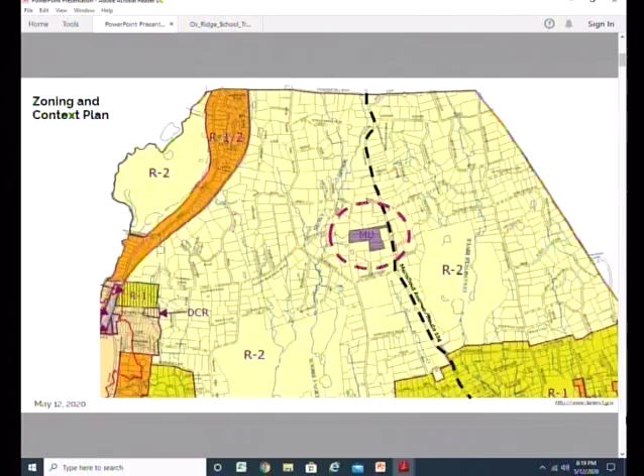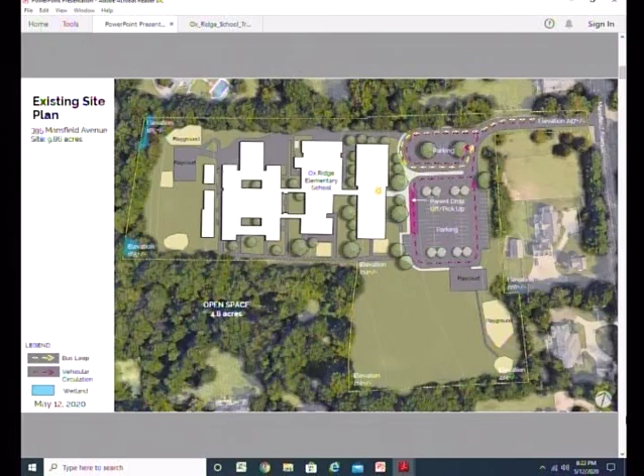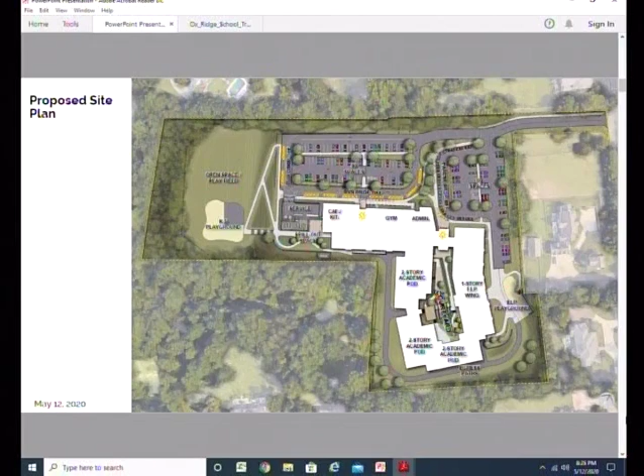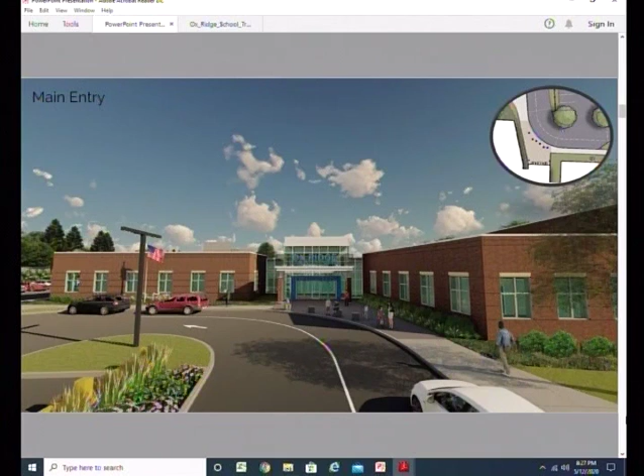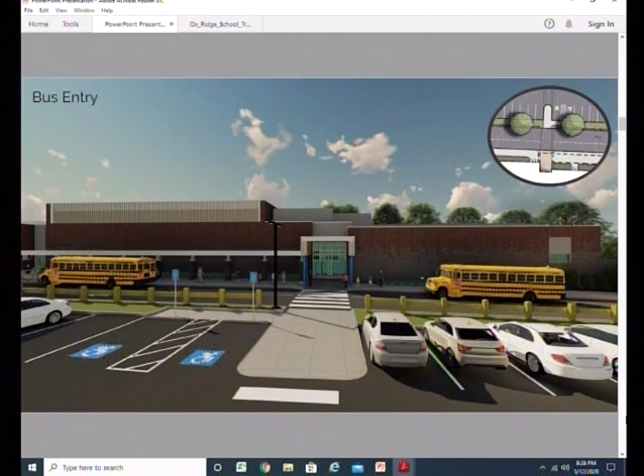This is a view from the bus loop, from the entrance from the parking lot within the bus loop, looking at the secondary entrance into the lower assembly area of the building. This is where the students would ingress and egress for loading and unloading the buses, as well as this serving as a secondary entrance for community events after hours for use of the gym, cafeteria, and other large assembly spaces within the building.

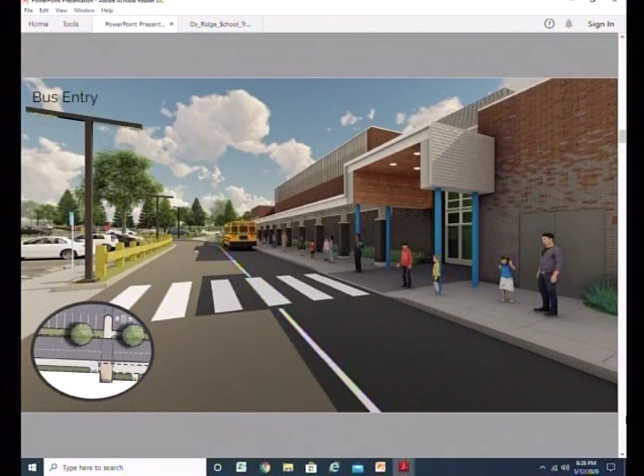Just a different view of the bus loop, showing an extended bus loop canopy, and how the bus loop works. There is a park aisle for the buses as well as a drive-by aisle for buses to move in and out as they load and unload.

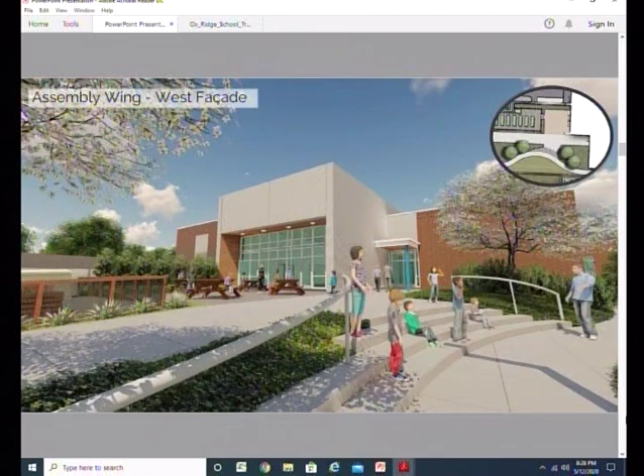As we move around to the west side of the building, this is outside of the cafeteria. That large glass facade is the cafeteria space behind. We also have an exit from the corridor, which is that small canopy and blue column. That main circulation path comes down that sidewalk immediately to your left in the image and continues down to the K-5 playground.

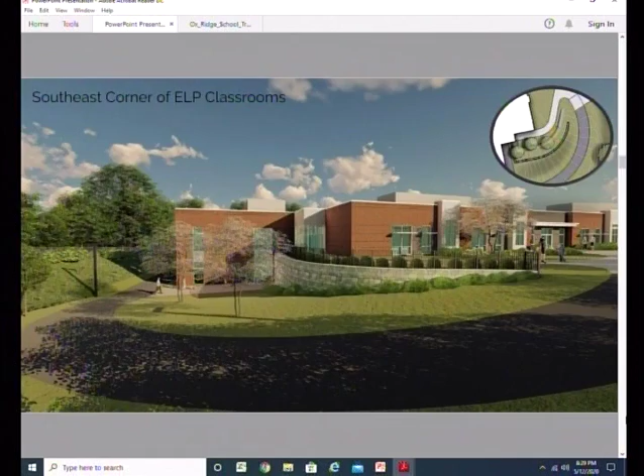Just another view of the early learning program wing. The design was intentional, creating a rhythm to try and break up the scale of this long single-story building, to help address the scale of the residences immediately adjacent to it to the east. You can also see the ELP playground there in the foreground.

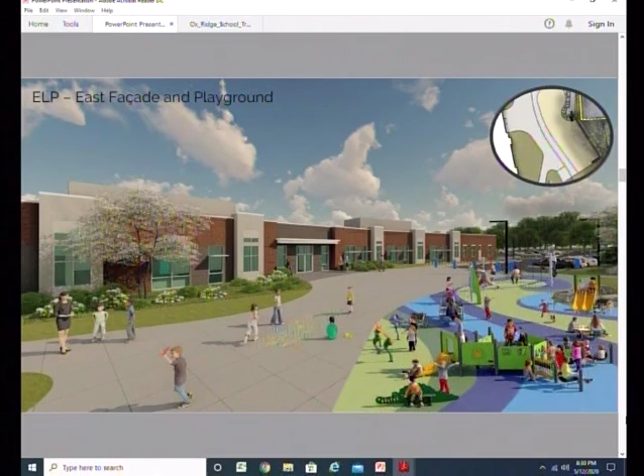One of the main features of the school is the interior courtyard, which has been developed to be a curriculum space as part of the school program. It takes advantage of the one full-story building grade change from the upper ELP single-story building that's in the far view of this image.

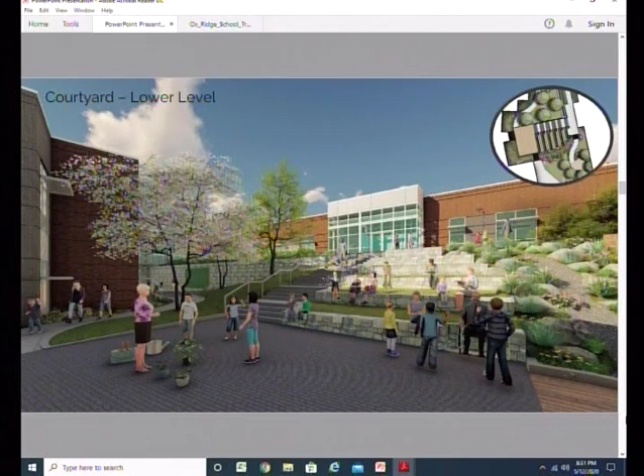We have developed an amphitheater type space that helps transition from that upper level down to the main level or lower level of the courtyard, creating an outdoor classroom and outdoor seating steps to enable multiple classes to come outside into the courtyard and have an outdoor classroom environment.

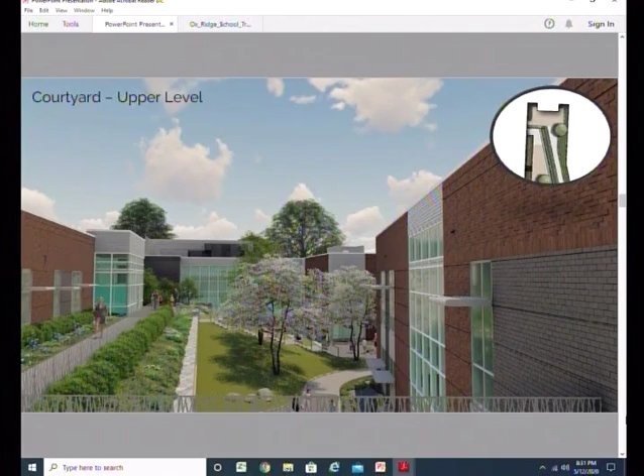Just another view of the courtyard from the upper level, just outside of the main entrance lobby. As you come through the main entrance lobby, you can emerge back out into the courtyard, and this would be the view, where you can get a better sense of the full-story elevation change from upper to lower, left to right on the page. We could just advance through the next one, and that's just looking back at that entrance lobby from where we were.

As far as building height, we are within the height allowance for this site, R2 and MU. We are at a 31-foot 3-inch building height from an average grade plane established around the building. The main floor level is at 224, with the assembly level at 218, which is 6 feet lower, and our lowest level at 210. So we have a 14-foot floor-to-floor elevation change from the main entrance level to the lower level.

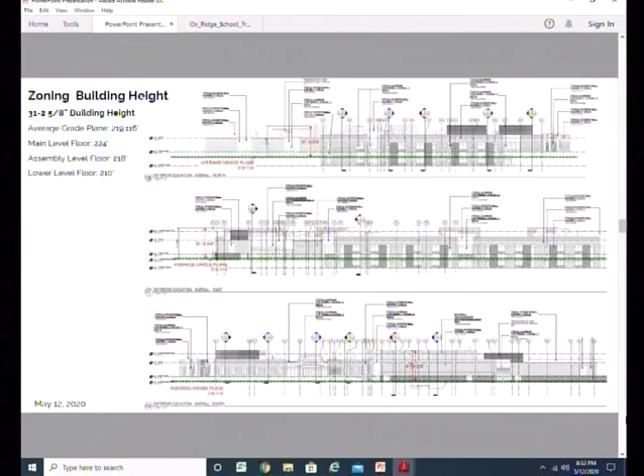So at this time, I'd like to transfer to Jessica Petro, our landscape architect, and she's going to run through some more details with regard to the plan and zoning.

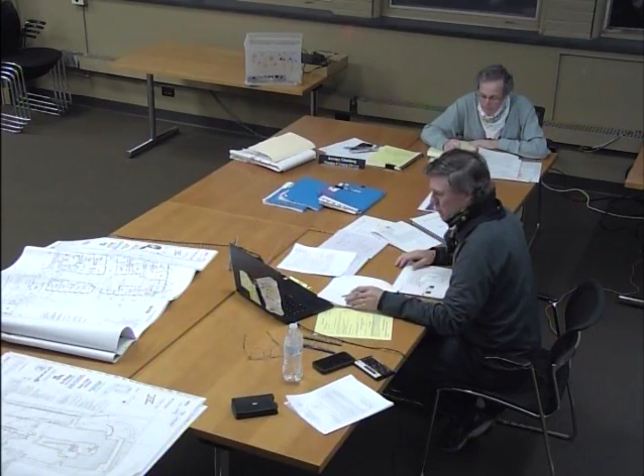I just wanted to do a couple of threshold questions myself, and then pass it off to my fellow commissioners. Just correct me if I'm wrong, but we read all the plans, and there's a bunch of different items inside there. There's going to be 24 classrooms of regular students, I would say K through 5. I want to confirm that. We have, I think, 428 students for those 24 classrooms. Are we on the same page, Ken? That's correct. Okay, then relative to the ELP classrooms, I think we have 9 ELP classrooms.

Correct. There's a little bit of conflicting stuff, and we can get into that when you want to. It's either going to be 135 kids for those ELPs, or it's going to be 150 kids for the ELPs. The document said 2 different numbers, so I think the principal of the school is going to speak later, so we can confirm that.

Right, I can offer some information on that. The spec requires 15 students per classroom, and so we're currently using the 135 number that I'm aware of, unless Luke has additional information.

Yeah, Luke Forshaw, Principal of Ox Ridge, you're correct, it's 135, 15 per classroom. Okay, because it's in the cover letter, which came from the SLAM Architects to the application. It talks about 135. I think in the traffic reports and the parking reports it says 150. But as long as we have the right number, it doesn't take a rocket science to take 135 and divide it by 9, and you get 15. So that's what I did.

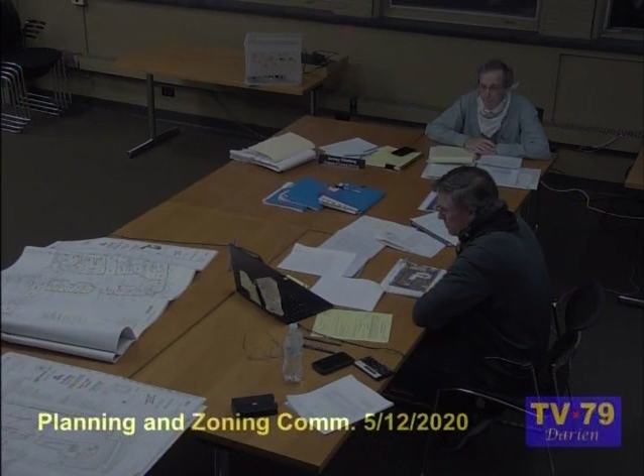This loop is designed to welcome students in. We'll continue to provide supervision for students in the mornings so they can get some extra recess in. So as those 8:40 waves are coming, students are unloading, they're greeted by staff, and they're going out to play. So by the time 9:20, 9:30 rolls around for ELP students to arrive, that area will be clear for them, and those few buses for ELP students provided transportation can go right up to where that sidewalk cut is, which leads them to the ELP wing.

You got it. Okay, and I'm sorry to direct this directly to Luke, but as he brought it up, maybe we can talk about it later when traffic comes up. It struck me that the ELP students, there'll be an increased population of them, and they are not provided busing, so there will be more parent drop-offs, and I don't think they carpool. We can reserve that for later, but it struck me because some of us may have been assuming ELP had similar busing, less traffic, less parent dropping off, like a K through 5 elementary school would, but we can discuss that later.

Right, we also have the traffic engineer with us tonight, so that'll get addressed. Thanks. Okay, you good, Karen? And I'm just going to get us back to where we left off. There we go. Any other questions? Everybody's good? Carrie, you're good? I think we got everybody.

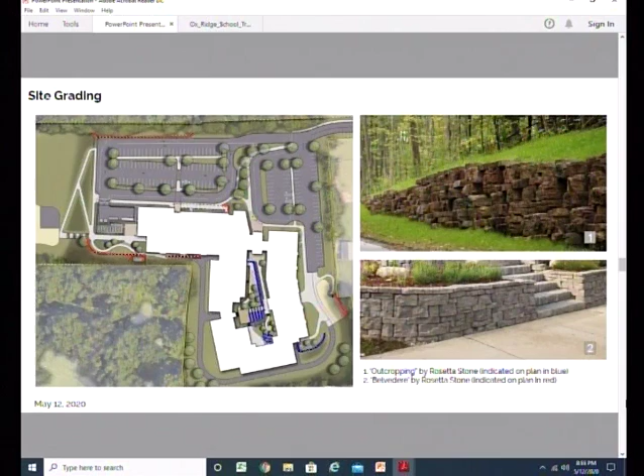Go to the next slide.

I'm actually going to pass it off to Will Walters from Benesh, who's going to talk a little bit about the site drainage plan for us. Okay, great. Thanks, Jessica. Everybody, for the record, Will Walter, professional engineer with Alfred Benesh and Company, site civil engineers.

I'm going to briefly... Well, can I interrupt one second? Sure. I just want to make sure the commissioners don't have any real questions on Jessica's presentation. So let's go around the horn real quick on that.

Jennifer, the only question I had with regards to that is if Jeremy could confirm his interpretation of the setbacks for all of us in the room, because with regards to rear lots and setbacks and whatnot, that becomes Jeremy's bag. Jeremy, please.

Right, we spoke earlier about section 424 of the zoning regulations, which outlines the area and bulk requirements in the MU zone, which is what this property is in, the municipal use overlay zone. Jessica accurately reflected that you take the front yard and add an additional 50 feet. So in this case, because it's a rear lot, the front yard setback is 75 feet. And she's correct that section 424 requires a 25-foot setback, which under the various notes in section 424 the commission can reduce down. As Jessica confirmed, there is no reduction being requested to go down from 25 to 8 in terms of those. So from a setback standpoint, that was accurate.

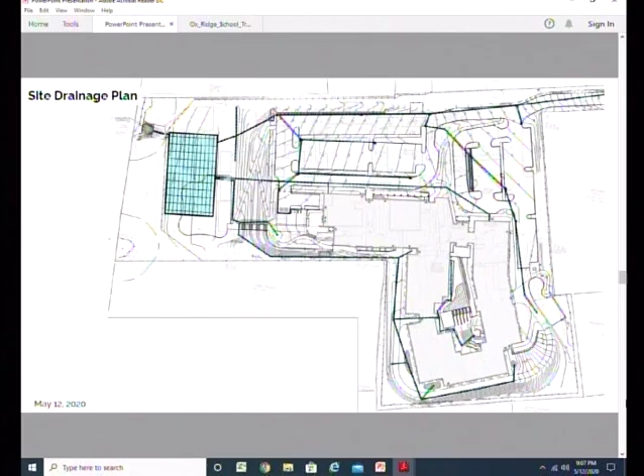As the commission members have in your packets and also on the town website, you have the report from Benesh, the 500-page report, and a shorter summary memorandum, about 4 pages, done by Benesh. For the commission members, that's number 8 in your packet. We also have Craig Flaherty's letter review, which is number 9 in your packet. That's also been posted to the website, and it's 5 pages long.

Mr. Flaherty's here tonight. As Will mentioned, they're going to hash through the comments back and forth. You'll likely see some revised plans on the website and in your packets for next week, and those revised plans will be gone through in more detail next week, talking not only about holding back water but how they're dealing with water quality. I'll also pass along the neighbor's email received tonight, which had some questions about drainage, so we can look at those and be ready to address them next week.

I think that's 45 Hancock. Yes, the property owner in the top left of the screen at 45 Hancock — that little stream in the top left corner is right near that property line. That's that guy right there. So I'll pass along his comments, post them to the website, and pass them along to the commission members. I don't know if we want to go to the commission members or Craig first.

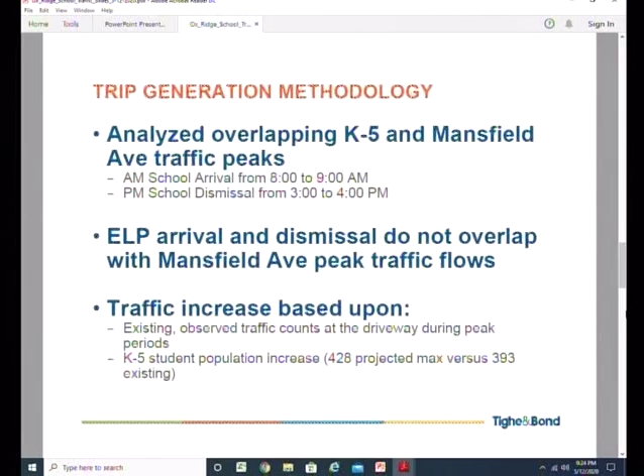So really what we were looking for was the worst case scenario, which was this overlapping Mansfield Avenue commuter peak and the K through 5. The existing traffic volumes as well as the traffic increase were based upon the observed traffic volumes of the driveway as well as the enrollment - the student population increase for the K through 5, which was the 428 versus the 393 existing.

And again, FP Clark and Connecticut DOT have reviewed and approved these projected traffic volumes.

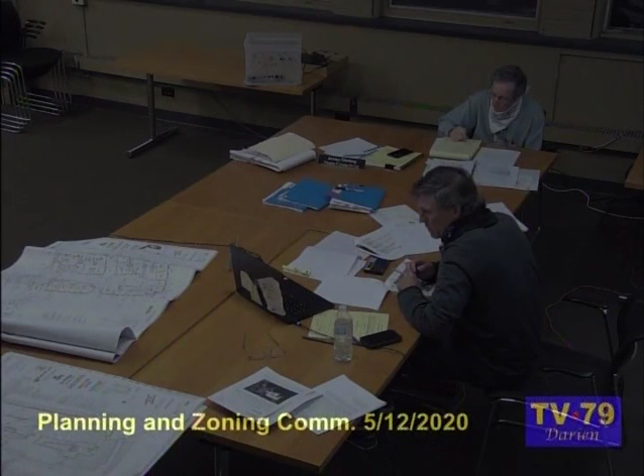That's correct. The parking was reconfigured following the finalization of this report, but that doesn't change the numbers of the enrollment, so that's what we based our traffic generation on.

On that page, which is 1-1, you talk about 150 kids in ELP. At the end of the day, it's supposed to be 135. To me, that's fine that you went more conservative, because that's going to help you a little bit. But if you just note in there that the projected one was supposed to be 135, so people don't look at it and say, hey, they made a mistake. You follow me? Yep, okay, great.

With regards to the difference in trip generation morning to afternoon, where you talk about enter, exit, and I'm looking at your PowerPoint presentation, table 4. Can you just confirm for me, in the morning you have more, the total is 290 versus 243. Is that because dads like me drop off my kid in the morning and don't pick him up in the afternoon? And they take the bus home?

Yeah, generally that's what we see. The morning peak hour in almost any type of environment with the commuter and kind of school traffic is that there's a lot more condensed traffic in a shorter period of time in the morning, whereas in the afternoon there's after school activities, there's other things that lower that trip generation for that one peak. Especially when you're talking about a school where it's before general work days are over.

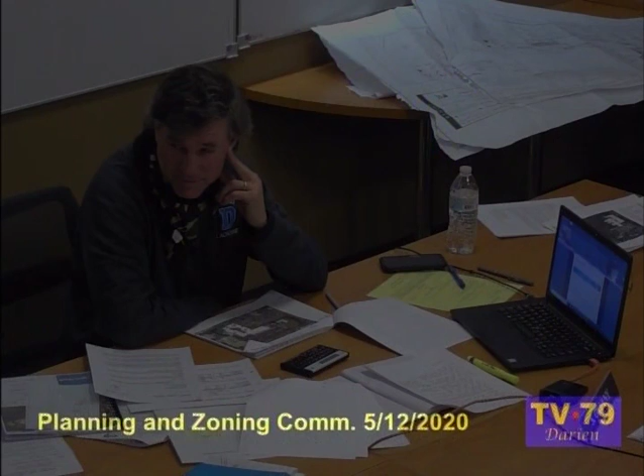So say there's 4 cars on the side street, on the driveway, and we set it so it could be a maximum of 21, with a minimum of 10, just as an example. Each car calls an extra second, so it would be 14 seconds as opposed to 21. The remainder of that time would go to the main.

Before Sean can chime in, after Mike, I want to real quick—maybe we should ask the question this way: what defines whether it's phase 2 or phase 4?

That's just the way the cycle works. It's pretty common that when you have a single lane road, you have an advance for one direction so they can make left turns. You have a main line, that's your main traffic—your highest volumes northbound and southbound is usually phase 2—and then there's up to 8 phases, depending on how many intersections there are and all that stuff.

Wait, so the phases are actually location driven more than timing? The phases are controlling a movement in a location. So if you have an intersection with turn lanes and everything else, you'll have up to 8 or 9 phases. But this one is pretty simple—it's just the 3.

Are we ready to have Michael Galante jump in? Can I interrupt? It's my thing. Yeah, I was going to say, I think we might be ready for Michael Galante to jump in. Can I just have one more clarifying question, just because I think it wasn't clear to me?

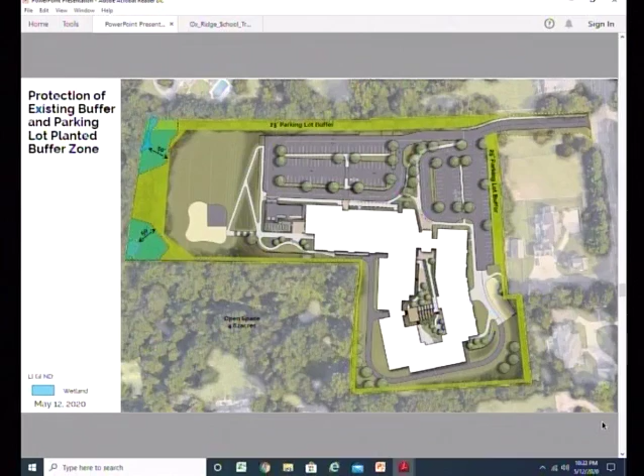You can go to the next slide, Amy. Sure, thanks.

The good and beautiful edge conditions that you have to the site has a higher canopy established. So you might have an oak or a sycamore that has a very large canopy, but that we're looking to preserve. But we also were looking at how we can incorporate some additional screen planting within these edges of the site to work within that buffer for the parking, but also just to reestablish that edge to the adjacent parcels.

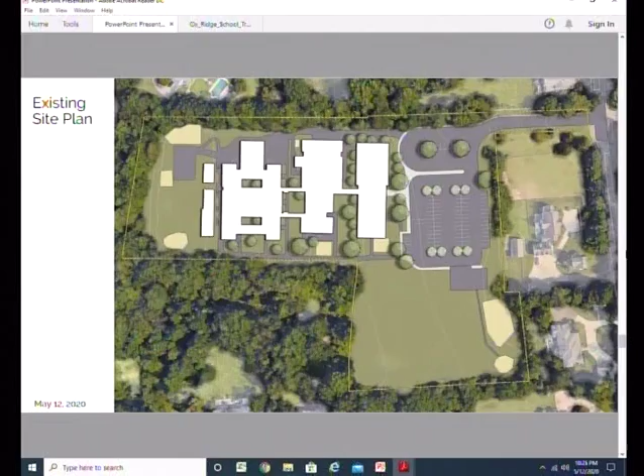Okay, great. So we'll jump into the site circulation, internal circulation. Our site is showing now that we have a proposed parking count of 140 parking spaces: 135 standard parking spaces, and then 5 accessible, 4 of which are standard accessible and 1 is a van accessible parking space. Total need from the school from a programming standpoint is 136, and 15 of those parking spaces would be for visitors. So essentially the site plan shows 2 zones of parking where we've been calling an upper and lower parking zone.

The upper parking zone is your first parking lot as you come into the site, with circulation denoted in purple showing parent and visitor drop-off, pickup, and ELP parking. The second parking lot is a lower lot, which is our bus loop with the yellow dash line, and internal parking for faculty, administration, and other staff. The next two slides will break out an enlargement of each of these parking areas.

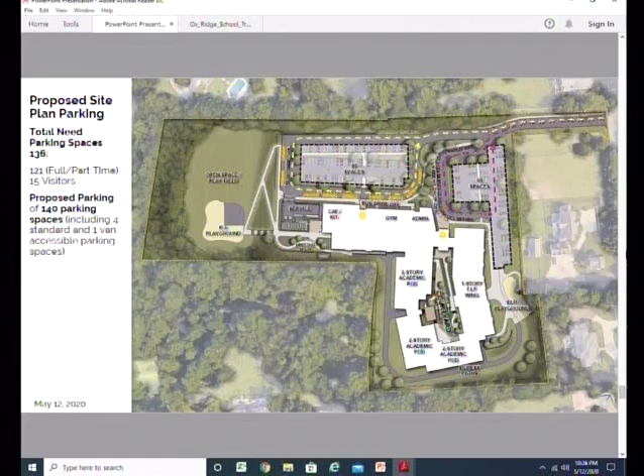The first one is the upper parking lot, which shows parent circulation. We have the same entrance as the access drive into the upper parking lot, and arrows in white showing the circulation patterns. Currently we're showing 14 cars that can stack, highlighted in the purple dashed bar, as a parent drop-off opportunity, with a full pedestrian sidewalk adjacent to that pull-off opportunity. There's a continual drive aisle adjacent to that, and then you've got 60 parking spaces within this upper parking lot for visitor and ELP.

From the existing conditions now, the school has an opportunity for 4 cars to load and unload for parent drop-off. This new opportunity shows 14, depending on the programming with the school and administration and aiding those children to get to the main entrance.

Just a few highlights here. We do have the capacity now to unload and load students at a higher volume than we currently have, 4 versus potentially 6, I think, would be a safe estimate. We'll see how that rolls as we move into the new building, but certainly 6 would be a good place to target initially for loading and unloading students.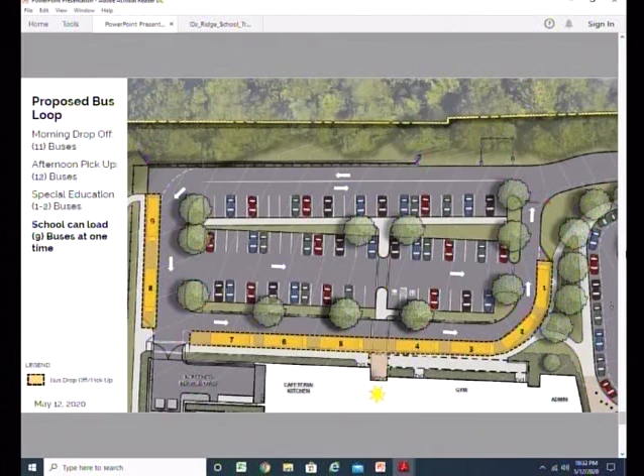If no one has questions about this right now, I can go to the last slide, which we looked at event parking opportunities. This analysis was based on linear feet of curbing, which would not disturb the fire lane. So the fire lane and fire circulation or outrigger locations are shown as that red bar.

The purple shows opportunity along the curved edge where you could have additional parking, under the assumption of having policed and monitored traffic direction and safety for those special events the school has a couple times a year. This graphic shows the opportunity of 64 additional parking spaces, which could bring that count up over 200, to 204.

Those are the main points, if anyone has any questions. That's great, Jessica, I appreciate that. I would like Michael Calante to go next. And if the commissioners don't mind, we'll take commissioner questions from Michael and Jessica at the same time.

I take it you reviewed this, Michael, pretty extensively? Yes, I did. And we agree with all the numbers that Jessica pointed out as far as the need outlined by the school district: 121 spaces, plus 15 spaces for visitors during the day, for a total of 136 spaces overall needed on the campus.

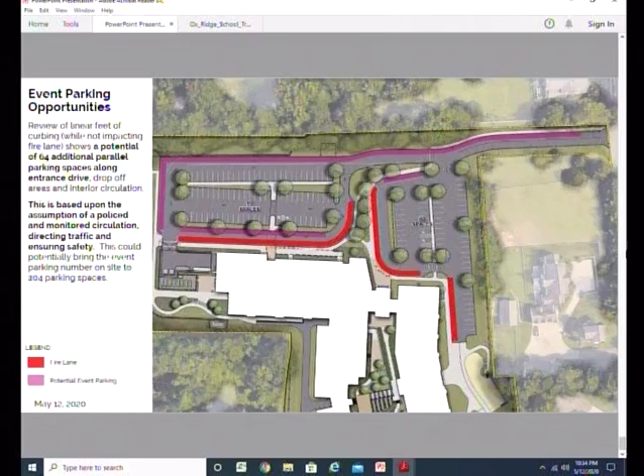But the ITE standards, the Institute of Transportation Engineers, do a lot of research and counts at schools and other land uses, and we use that data to look at what the parking demand would need to be for an elementary school such as this. Based on the enrollment of 578 students, you would need, according to ITE, 116 spaces.

And that's not average, that's the higher number; on average it's really like 96 spaces. So I feel pretty comfortable that if we're at a number of 116 for a typical school like this, and they're providing 140 — and let's leave out event parking for a moment — I feel comfortable that we can meet the needs of the school on a typical busy daily condition.

The event parking information, which increases it by another 64 spaces, or in the loops, is significant on parent night, for example, or graduation, whatever it might be. I assume we'll have graduations again at schools, hopefully in the future. But I'm comfortable with the numbers and information they provided as far as on-campus parking.

Thank you. So your second point, what you just talked about now, is really your second letter dated May 7th, right? May 4th — I've got April 20th and May 7th. No, I think there was an issue, Mike, with the date on the letter. Read the heading on that: parking evaluation. Correct, parking evaluation. Oh, okay. We changed the date for you, bud. Okay.

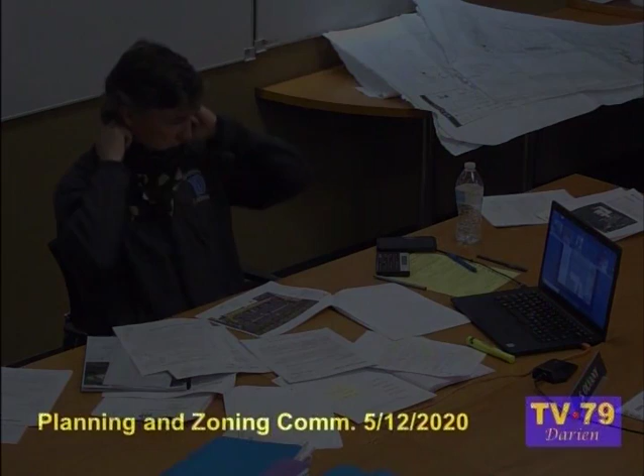I don't know who that's for. Sorry, this is Jessica Pedro. We did analysis utilizing a 30-foot length truck that can do the turning radius to get into this area of the loading dock. We've also had additional conversations with the school facilities - if there was a larger truck needed, they could park within the initial area of the fire lane and then use a hand truck to get into the loading area, because we have an adjacent ramp within this loading area, where Amy's putting the cursor, to be able to get into the building at that area.

So do you expect the 30-foot truck can back into the service area up against the school building? Correct. And we have turning analysis that has been incorporated in the documentation to show that. Good, okay, that's all for me. Thanks. Thank you, George.

Next up, Kara Gately. Most of my questions and concerns have been answered already, and I appreciate this was a really thorough and thoughtful presentation. I really appreciate it.

I guess my initial question is, how did we go from 60 spots to 80? Did we just reduce some of the trees and expand it, in that upper lot, or is that the lower lot? It's the lower lot. Within the bus loop, we've looked at the circulation - before you were turning in a little bit earlier from where that cursor is into the parking lot, and by allowing the cars to turn the corner and then come into the parking area, we were enabled to expand.

Cars are down here, that's the bus loop, not the car loop. I'm sorry, I couldn't hear you. You were talking about this being the bus loop. I think Kara's question was on - they can turn into the initial start of the bus loop, whereas before, in previous studies, they would turn into a parking lot before turning the corner where the bus loop would start. So by reconfiguring the entrance into their parking, it allowed us to get more parking spaces into the site down there. Does that make sense? Is there no safety concerns or liability issues with doing that?